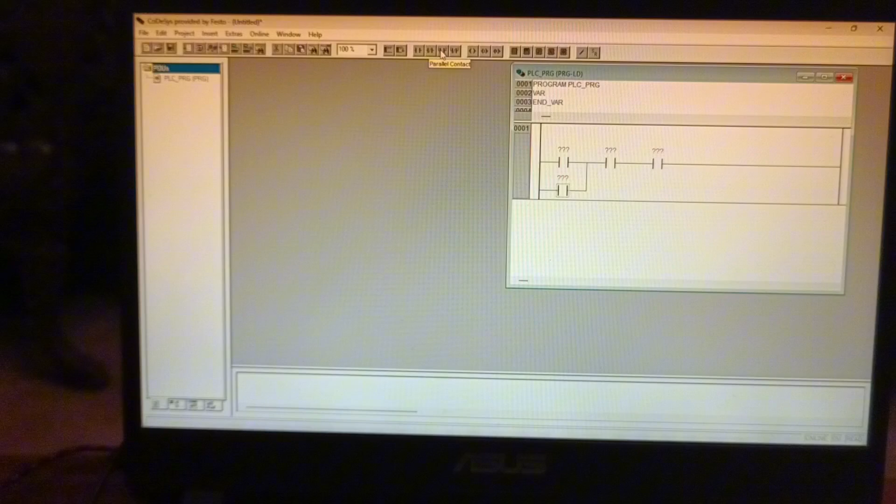Next we need to create a diagram. We need input switches: one, another two, three, and we need to add two more switches, then the last one.

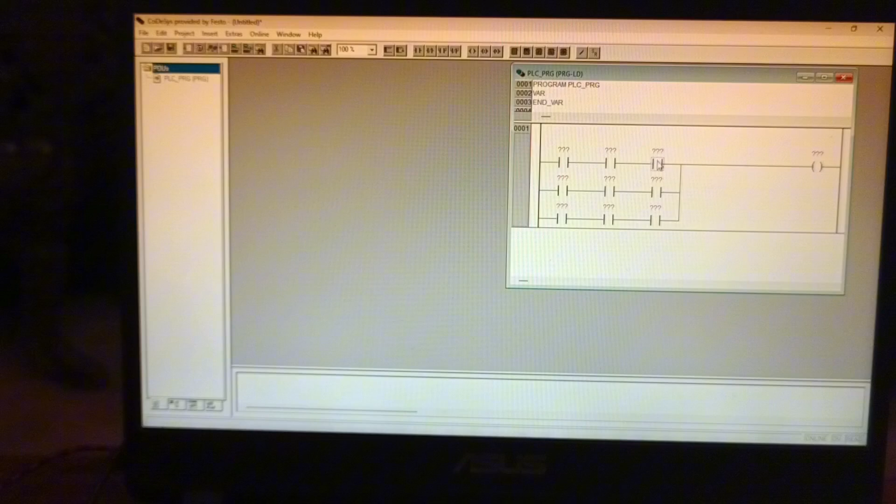We also need a lamp, which is the output, and we need to put an address on each of the switches. Here is push button one. The code here was %IX4.0.

For push button 2, we put an address: %IX4.1. And for push button 3, we just need to label this as another latching switch.

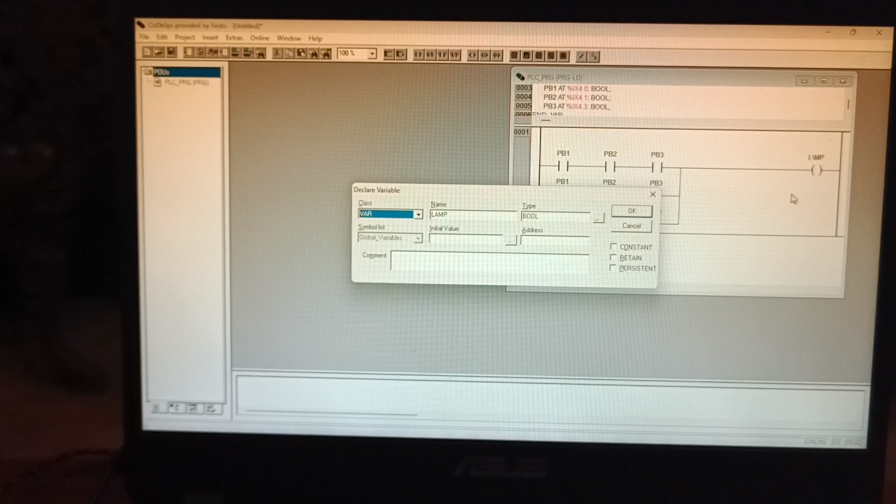We also need to put an address on the output, which is the lamp. The address on the lamp is %QX2.2. So we can see the address here at the top.

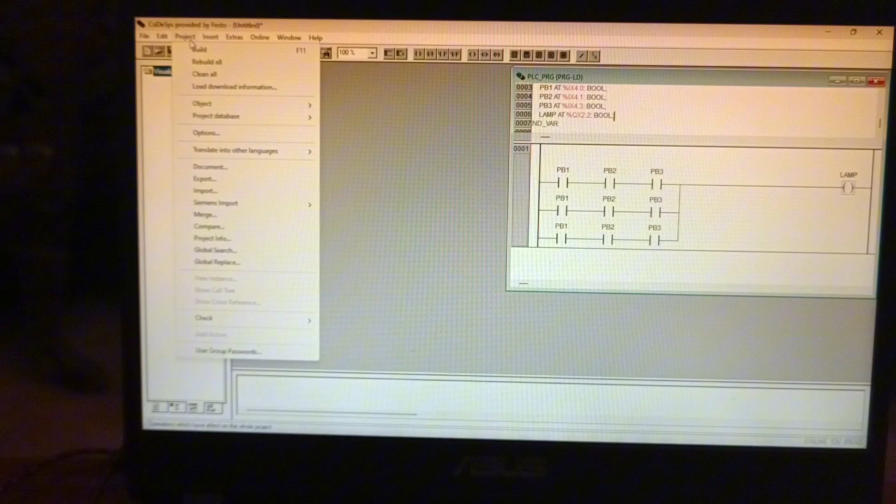The next thing we do is put a visualization. So project, then object, add, and there we go.

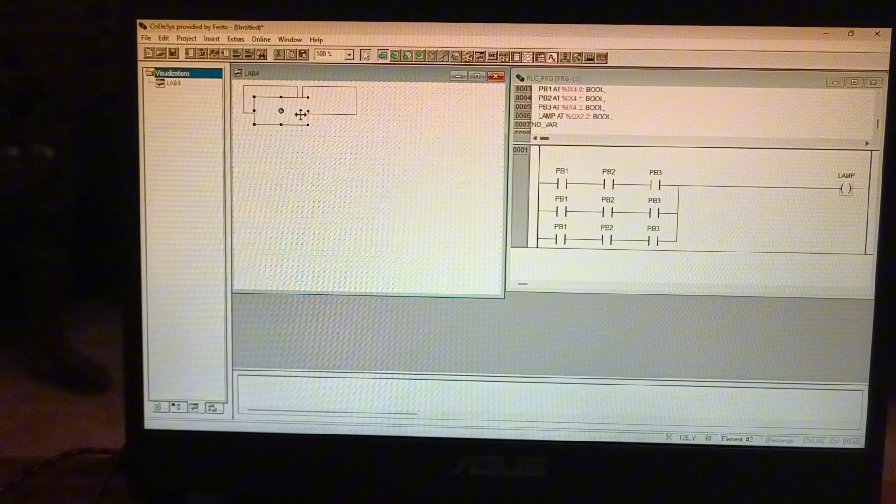We just need to fill this in. I guess a rectangle for the switches, another one for push button number 2, and another one for push button number 3. So it's going to be an ellipse, and we need to put an output, which is the lamp.

The next thing we do is put an address on each of these shapes. This one is push button 1, and we need to put colors, green.

The next thing we do is to put variables, which is here on text display: PLC_PRG.PB1. So this is push button number 1, we select it. And another for input, top variable, PLC_PRG.PB1. There we go, we have push button number 1.

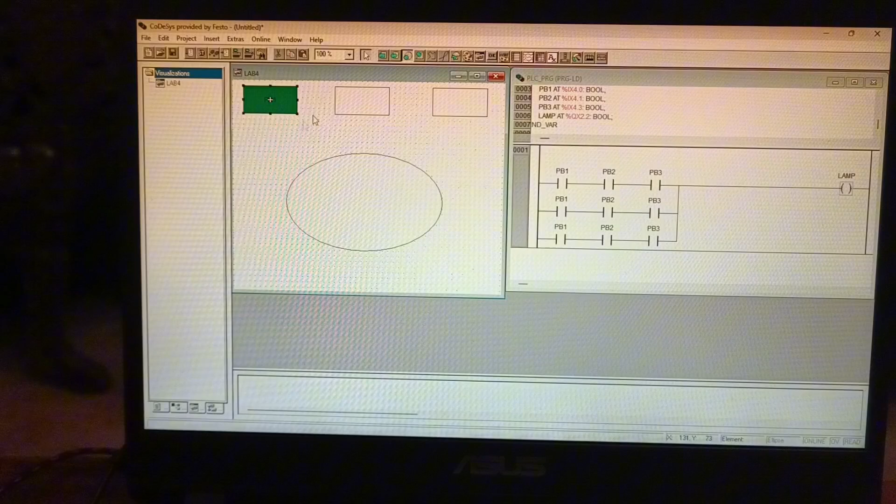Next we proceed to push button number 2. Colors inside green, alarm color red. So variables, text display, PLC_PRG.PB2, input PLC_PRG.PB2.

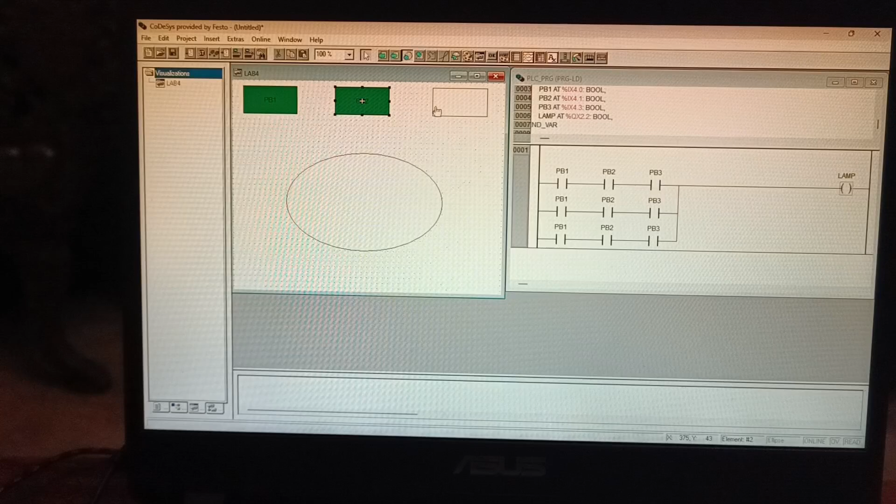Okay, number 3. Colors green, alarm red. Then variables PLC_PRG.PB3, same for the input, PLC_PRG.PB3.

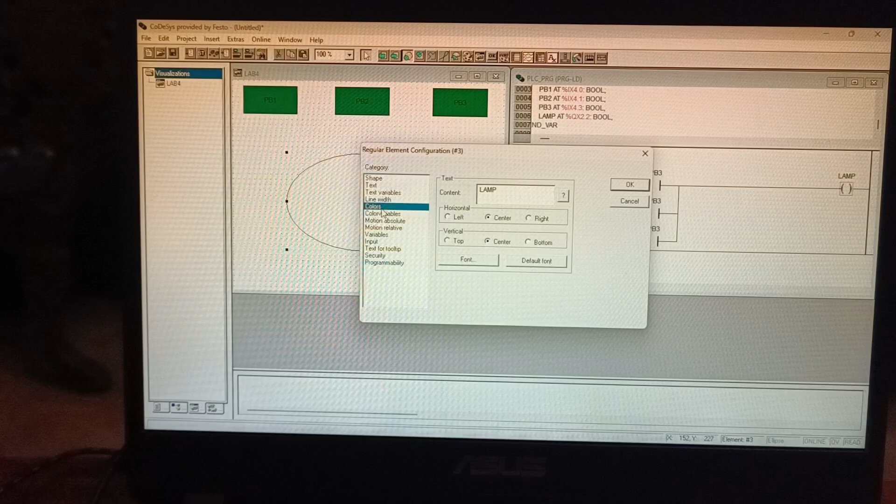Now the input is set. The next thing we do is put an address on the lamp. Colors gray, then yellow. Variables, text display, PLC_PRG.Lamp.

Now we need to test it. Online simulation mode, online login, no error, run. So when we press push button number 1, as you can see here, push button number 1 is activated, but the lamp is still not on. So when we press another push button, the lamp will turn on.

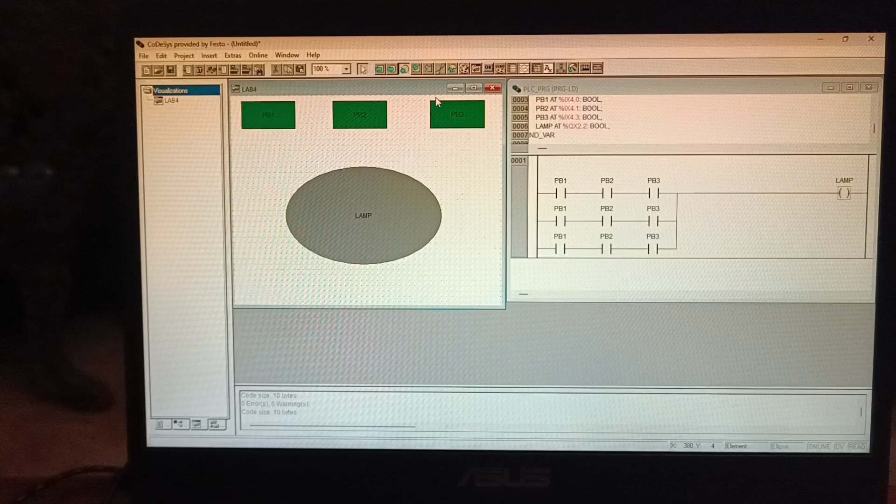There's a problem. When we click push button number 3, the lamp is still not on. We need to calibrate it. Now I can see the error, which is I forgot to put negate on each switch. So we need to put negate here on push button number 3, push button number 2, and also push button number 1.

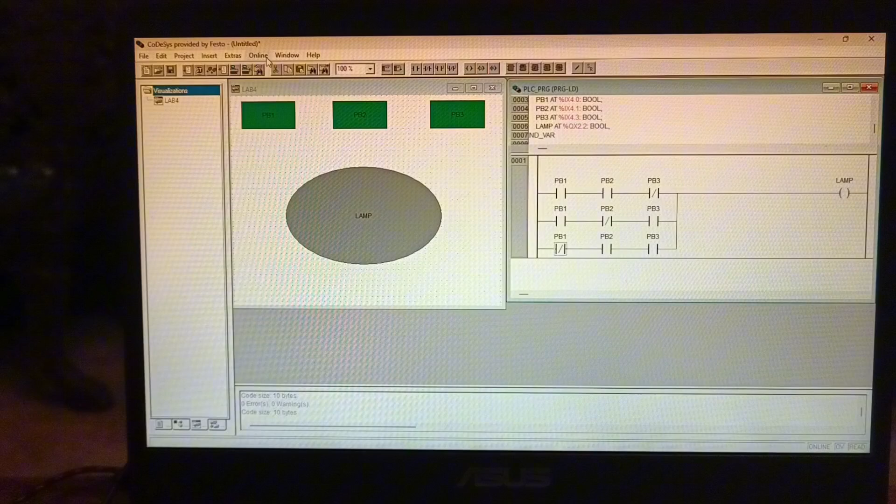Let's test it again. So when we press push button number 1, as we can see on the diagram, it's activated, but the lamp is still not on. When we press another push button, the lamp should turn on. Okay, that's a good sign. So when we press all 3 push buttons, the lamp will not turn on.

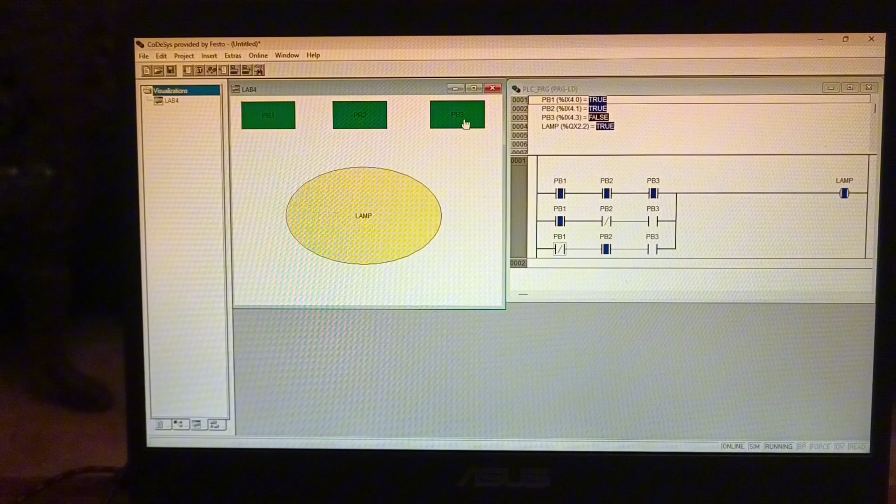This is push button number 2, so it's on because push button number 1 and push button number 2 are activated. And when we push push button number 3, the lamp will turn off.